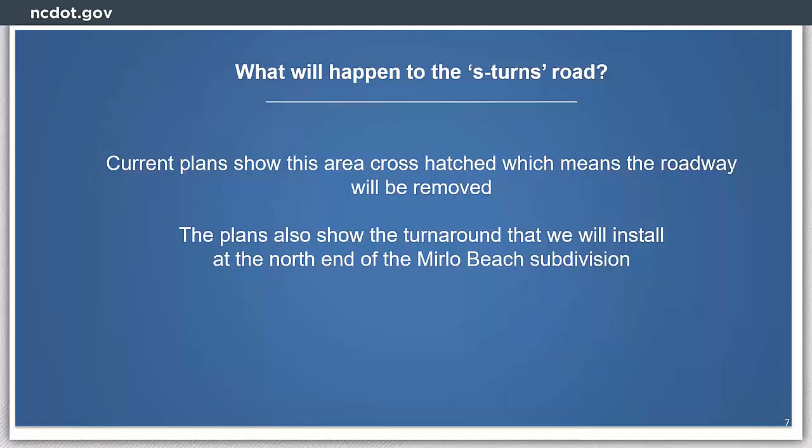What are the plans to ease traffic on NC12 during the high visitor season? Construction activities during the high visitor season will be restricted. There will be no daytime lane closures between June 15th and September 15th. After September 15th, there are no lane closures allowed Friday afternoon to Sunday night. So the impact should be minimal.

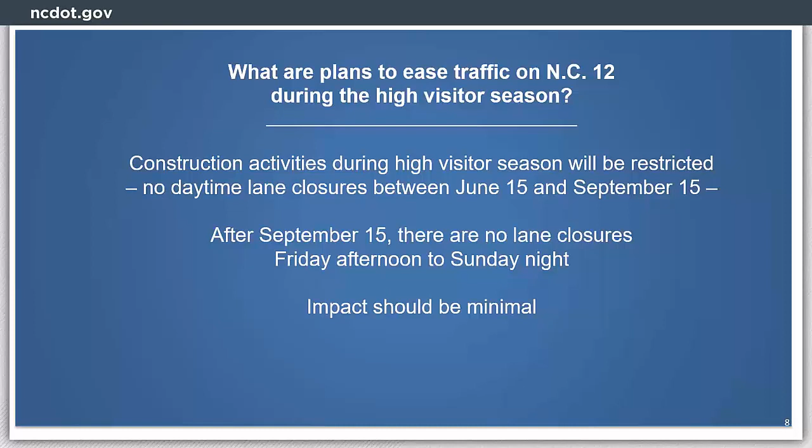Are lane closures anticipated in the spring as earthwork and paving resume? With paving ongoing at the north end, there'll be no effect to travel on NC12. We have a new roadway contractor working on plans for the south end, where there could be more involvement with NC12 traffic, but because of the newness of the contractor to the project, we're giving them time for getting a plan together.

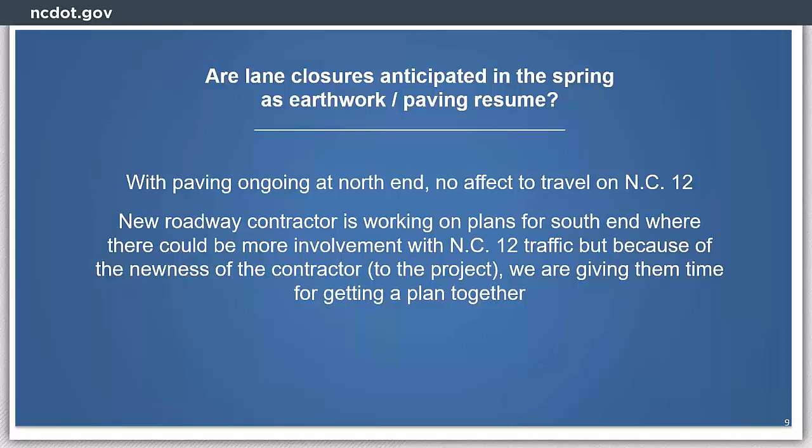Will there be a fishing area on the bridge? There are no plans for fishing access on this structure. This is strictly a highway bridge.

How many miles of NC12 does the bridge abate? That's approximately 2.8 miles that'll be bypassed by the bridge.

What is the average clearance under the bridge at the highest point? That's approximately 17 feet 4 inches from the water line to the bottom of the bridge girder. This bridge will not be a high-rise or humpback bridge, if you will, like the Currituck Sound or Oregon Inlet bridges.

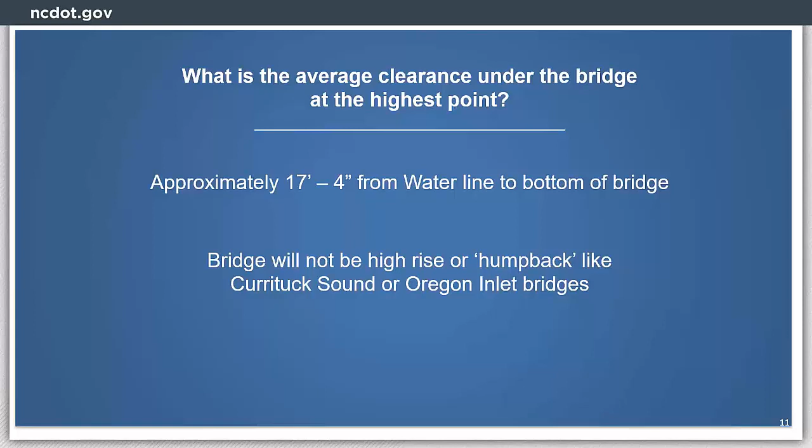When will the roundabout at the southern end be started and completed? Constructing the roundabout now or early was considered. But maintaining traffic on NC12 in the existing alignment from the Liberty gas station to the S-curves during construction, due to the bridge not being fully completed, would cause issues with traffic backups during the high volume time frame.

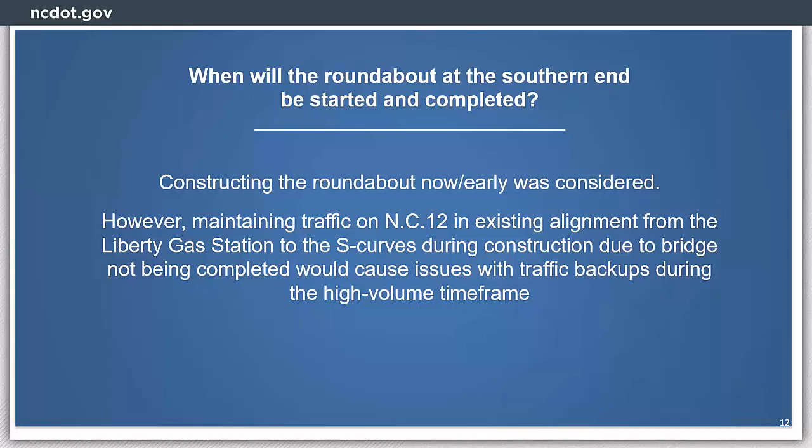Is there a bike lane on the bridge? Well, there is no dedicated bike lane on the bridge. However, 8-foot wide shoulders, like the Oregon Inlet Bridge, will be available on both sides. All paved areas associated with the project beyond the bridge will have 4 to 8 foot paved shoulders.

I'm sorry, I'm picking up a lot of background noise here. I'm going to try to make sure that we can fix that. That was me, Diane, sorry about that. That's okay.

The question was, what are you doing to prevent ocean overwash into Mirlo Beach after the road is removed, and are you installing protection going east to west to protect what has become a traditional washout area? At the end of the Mirlo Beach subdivision, along a portion of that remnant part of NC12, sandbags in the dune south of the refuge boundary will remain and will not be removed. Sandbags will be installed and a new dune running east-west will be built at the end of that NC12 remnant. One of the challenges along NC12 is overwash from many different points, so the department is going to do our best to maintain drivable access on the remnant.

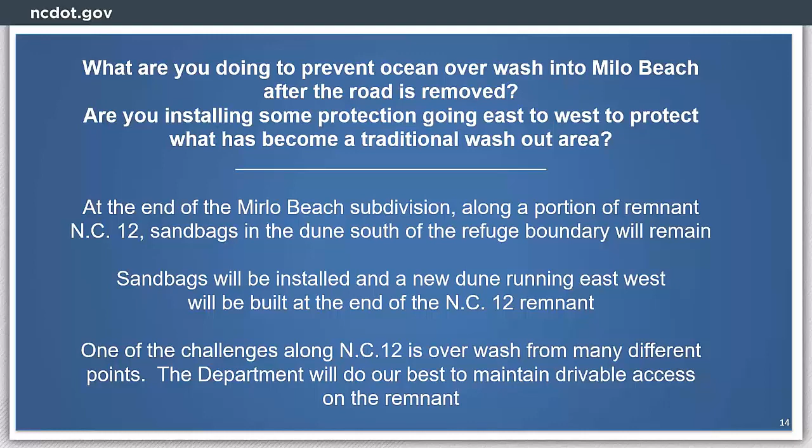That was a very quick and easy recap of the last meeting. Now we're going to move to Pablo's portion of the June 3, 2021 update.

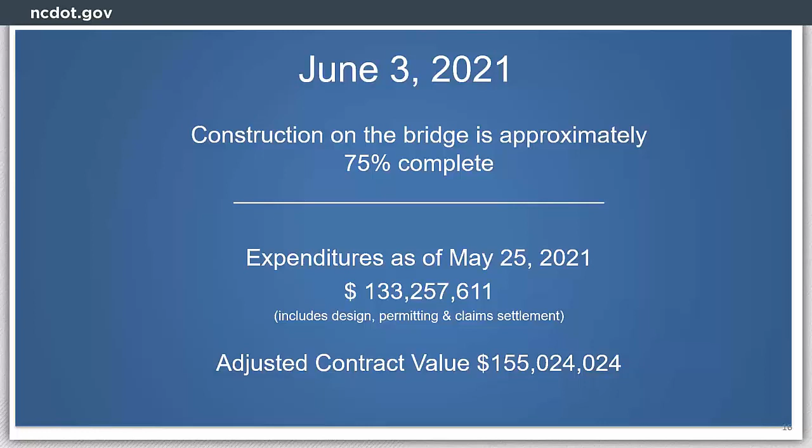As far as what's happening right now with June 3rd, we just crossed the 75% complete threshold, using that as a measure of the number of different bridge components that have to go together to build this structure. To date, that includes the design, permitting, and other claim settlement. We're just under $133.3 million, and our total contract value is $155 million. That value does include some claim settlement for permitting issues we had at the very beginning of the project.

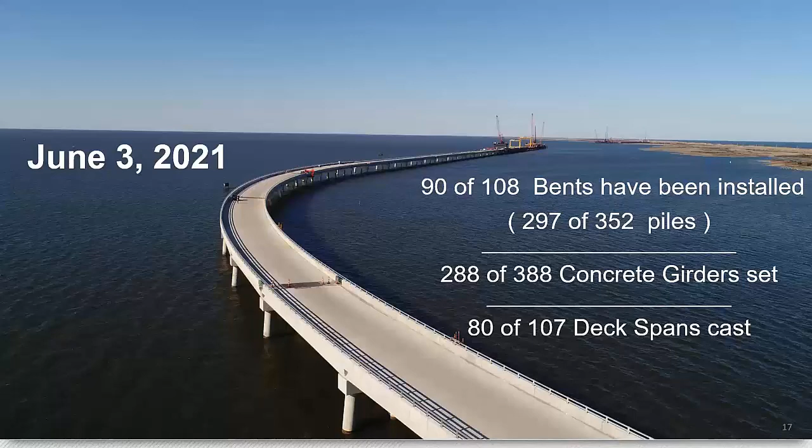Once we get the girders set, we then place precast concrete deck panels that allow us to pour the ready mix concrete to form the driving surface of the bridge. Right now we have 80 of 107 deck spans cast. The 107 deck spans means there are 107 spans from one end of the bridge to the other.

Just want to share a few highlights. Unfortunately, this has been one of the ongoing highlights for probably well over a year now, for at least our fourth community update meeting: pile driving on the northern portion of the project still has its challenges with the geology we're experiencing down there. Fortunately, one technique that has proven to provide good positive results has been augering or drilling inside the concrete cylinder piles, which helps loosen that soil so we don't overstress these piles and damage them.

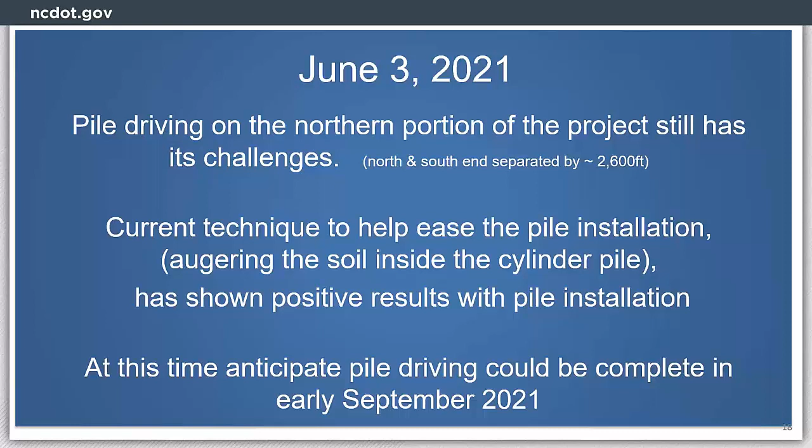Now I'm using the phrase northern portion of the project, since the two ends of the project, north and south—if you've seen recent media articles or driven by—are coming much more into view. They're about a little bit less than half a mile apart from each other. Based on how things have been going, we are anticipating pile driving could be complete in early September. That date does have some potential movement in it, since we're going into hurricane season, and we could just have a very stormy season with thunderstorms and rain showers, which also limits our ability to do work.

As I mentioned earlier about the two ends of the bridge coming closer together, as you drive by or see media pictures of the bridge, you'll see two sets of work trestles with the yellow gantry cranes sitting on platforms that straddle the bridge. Yes, if you projected them out in time they would meet, because obviously we want each end of the bridge to meet.

But the plan right now is that the northern work trestle will probably work on 3 to maybe 4 more spans of bridge, and then the contractor will start dismantling those components. The cranes, the gantries, and all the supporting structure for the rail system will be trucked off the bridge, probably going in multiple directions, either back south toward our large staging area behind the Liberty gas station, or possibly to another storage site in eastern North Carolina. It just depends on what the component is and what its next activity is.

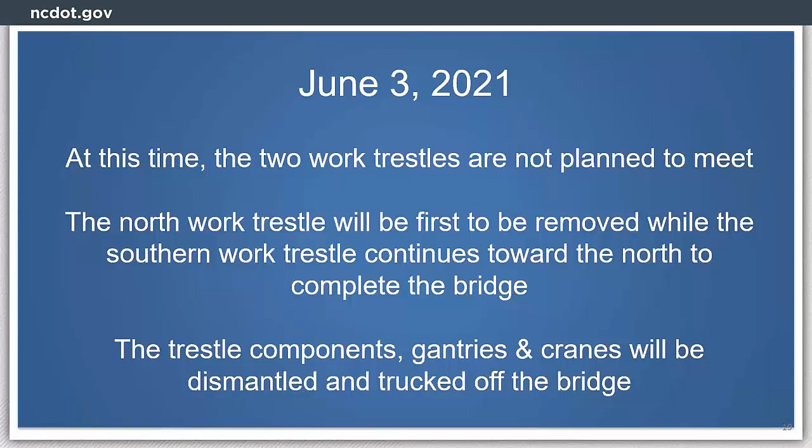What that would allow is the south end to continue working toward the north, and eventually join the two bridges together to form one bridge.

One of the components of this new bridge project is Cape Hatteras Electric planning to relocate their transmission lines to be supported by the new structure. Phase one of their project is to install riser poles, which are assemblies that accept the underground portion of their cables when they have to go up onto the poles.

That's phase one of their project. At the south end of the project, they've completed both the riser poles and the underground bore. They have not installed any cables yet, just got all the infrastructure in place so that when they're ready to pull cables, it's there. We're hoping later this June that they'll begin the underground bore at the north end of the project, and you may have noticed driving by that they've got some new poles sticking up at the north end as well. So fortunately, that work is three-quarters of the way complete.

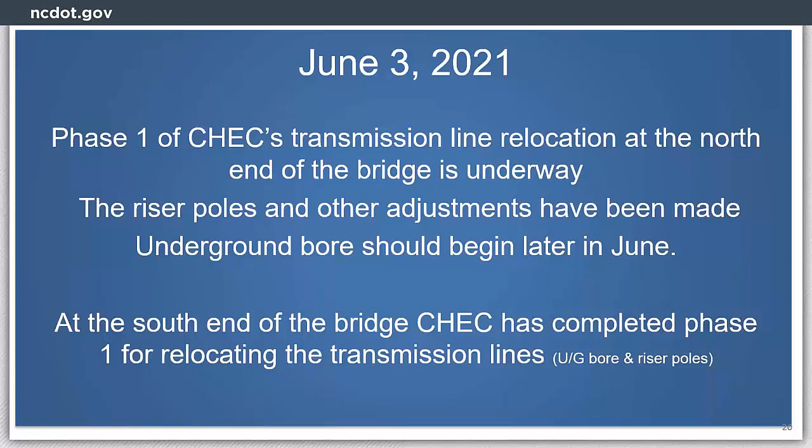The roadway contractor is still dealing with some backlog work and other work elsewhere in Northeast North Carolina, so at this time it has not been determined when they would resume that work. Most likely it will be late fall, possibly early winter. I don't see that roadway work beginning this summer, mainly because of our high traffic volumes and the restrictions on daytime lane closures and things like that.

Not only that, I think we've mentioned in other meetings that typically summertime is when a lot of resurfacing asphalt projects take place. That work is very time sensitive and weather sensitive, so the contractor's resources could be directed toward those other resurfacing projects around Northeast North Carolina. But as we enter the summer season, that also means warm weather, and since we still have some concrete to place for the structure...

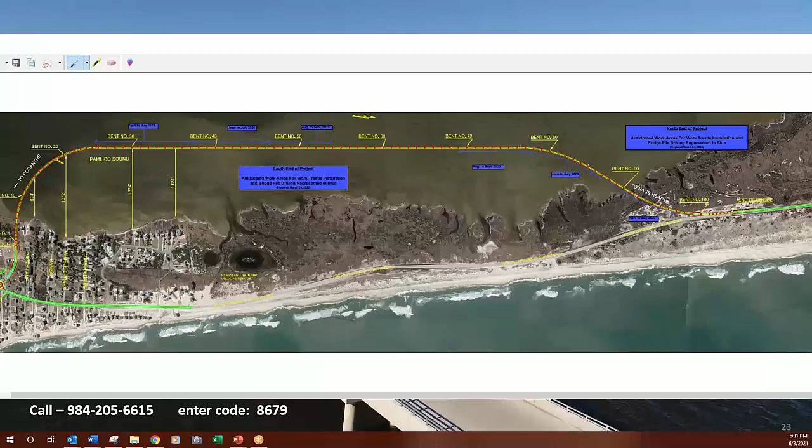Do we have any other questions? It does, and I will say that on...

On ncdot.gov, if you do a /projects/NC-12-Rodanthe, there's information on the project, and these maps are available. Or if you email us, we'd be happy to send you a copy. We can email them to you.

Oh, Adam, that would be awesome. If you would provide a link in the chat box. I guess I could have done that, not thinking. No, that's a good idea. I do have it handy, so I'll go ahead and put that in there. But thank you for the reminder.